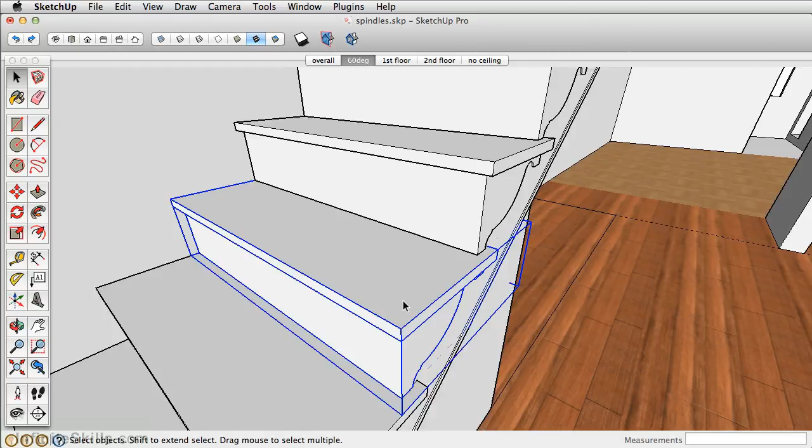In this video, let's add more detail to the staircase by adding the spindles that go up every third step. We'll start with this one here. We're going to zoom in. We're going to take the tape measure tool and draw a line or guide 2 inches and 2 inches off this corner here to get that point.

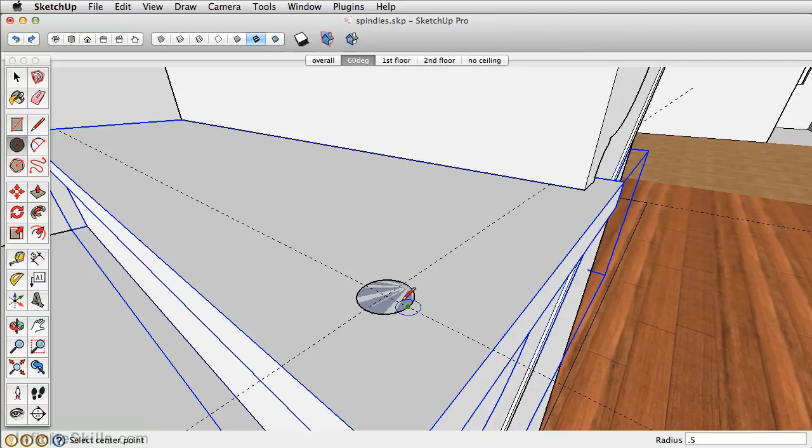Next, take the circle tool, draw a circle that's a 1/2 inch in radius, 0.5, then hit enter. Now, like previous components, I like to make these a component right away. So double click to select the geometry, right click, make this a component, and go ahead and just name it. Make sure replace selection with component is checked, and click create. Go ahead, double click, enter that component.

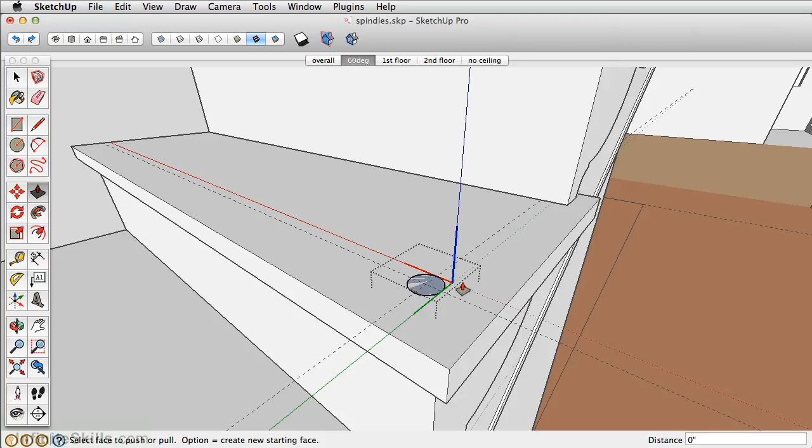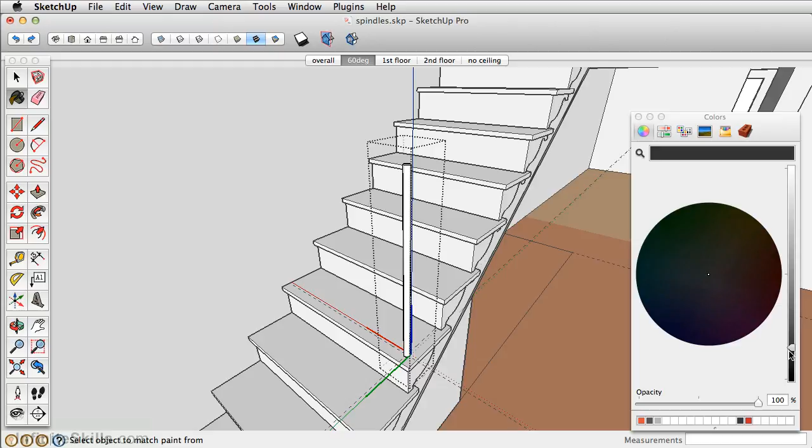Take the push-pull tool and push this up 32.5 inches. That's the height below the top railing. While we're in the model here, let's click on the paint bucket and just give this a dark black texture. I usually don't like going completely dark black. I'll bring it up a little bit just so it's maybe 80-90% gray. The reason why is you can actually see the line sometimes and it just gives it a little extra detail.

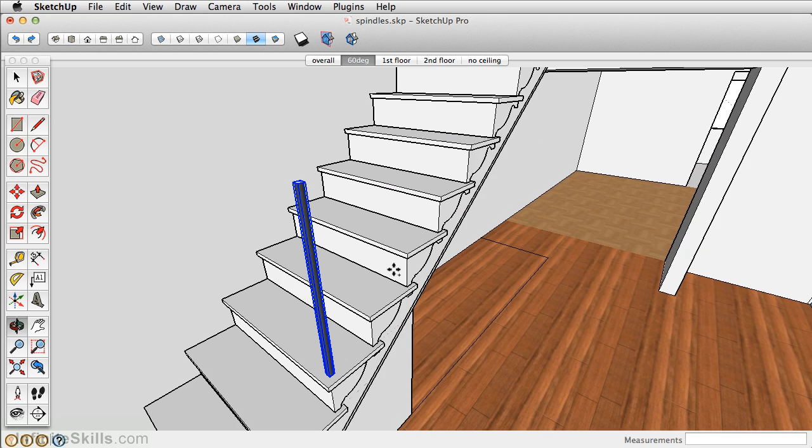We can delete our guides, go into Edit, Delete Guides. And now we can pre-select the component, click on the Move tool, make sure the little plus sign is on using Control or Option on a Mac, and copy this from this point here. So click once, and it's every third step. So we're going to click here. Next, I can type in 4x and press Enter to duplicate our spindles.

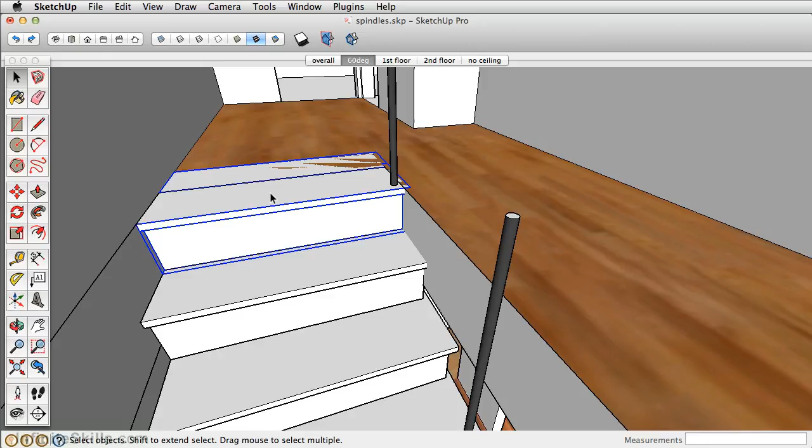Now I noticed up here we have a little bit of an error with our last step. So let's go ahead and make this unique and clean it up a little bit. So let's right click on the component and make it unique. Double click to enter the component. We're going to unhide the rest of the model so that we can see everything. And you may have to go back and forth just to get your bearings correct.

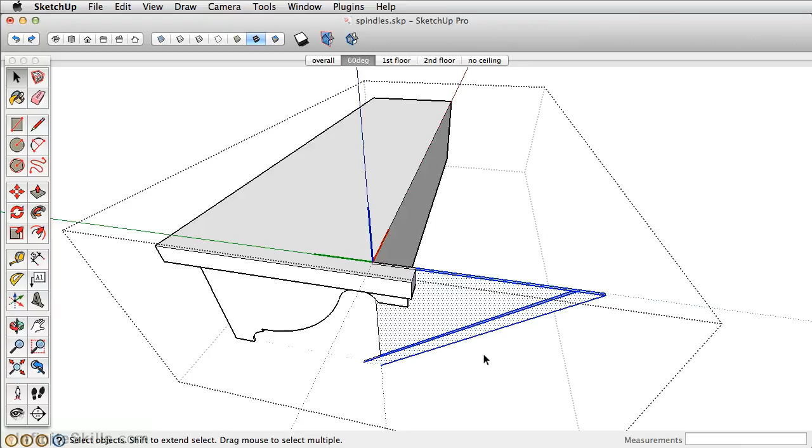So we want this, draw like that. And then we can push pull this whole piece through because we don't need that. Select from right to left and press delete just to delete that extra geometry. And if I hide and unhide, let's take the push pull, push this in flat with that surface. Let's push this flat and erase this extra geometry we don't need.

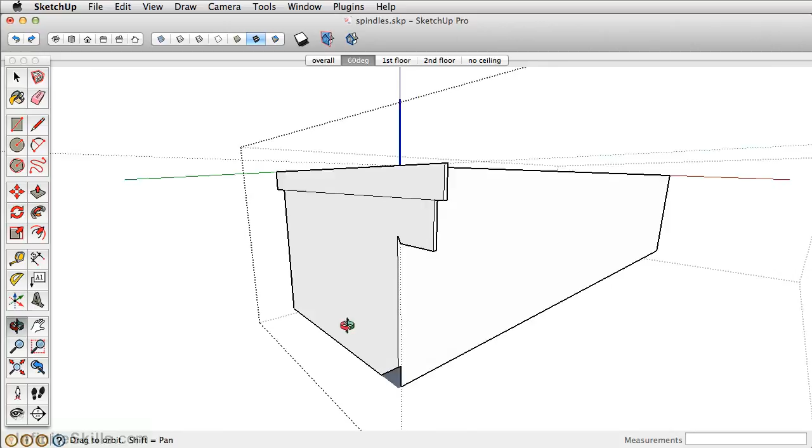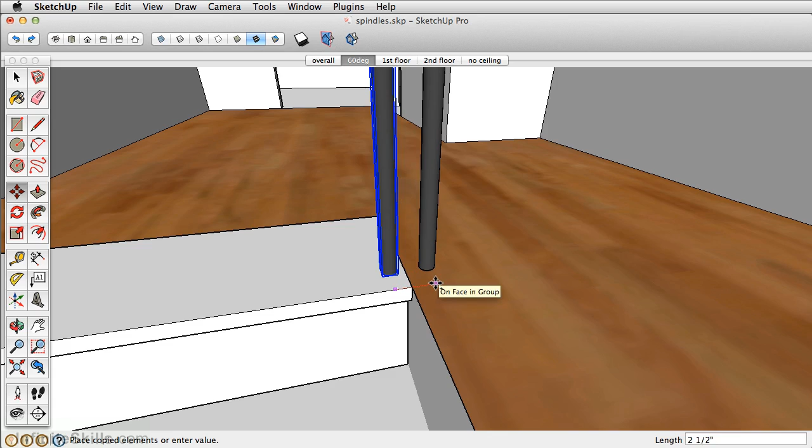This is okay. It's not really ideal to have this stray geometry, but it's an element that we're not going to see. So let's push this back, push this back. Now we're flush to that edge. To finish off the spindles here, let's take the Move tool with Control or Option on a Mac and copy this 2 1/2 inches over, orbit, and there's one spindle here. And then there's one at the end.

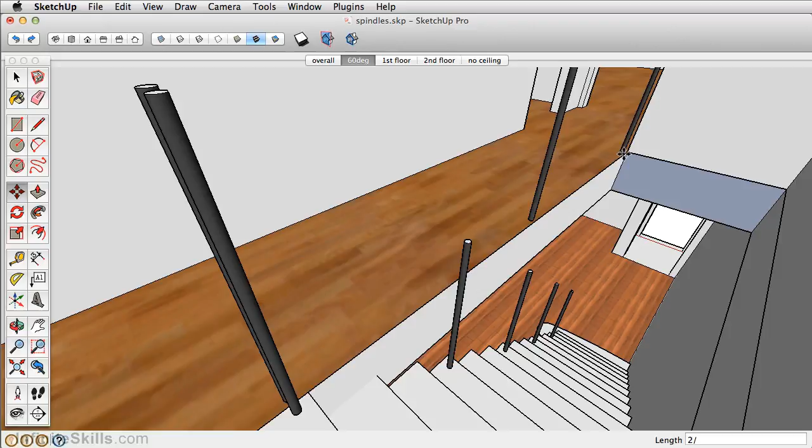Let's copy this all the way down till we reach the end. And then instead of 2x, we can do 2 divide and press enter. And that will divide our copy with a multiple between it. You could type in 4 divide, 6 divide, and so on. In this case, we only need 2. And it's a weird math. The copy is considered 1, and then the copy between is considered 2. So when you're dividing that, always include the additional copy.

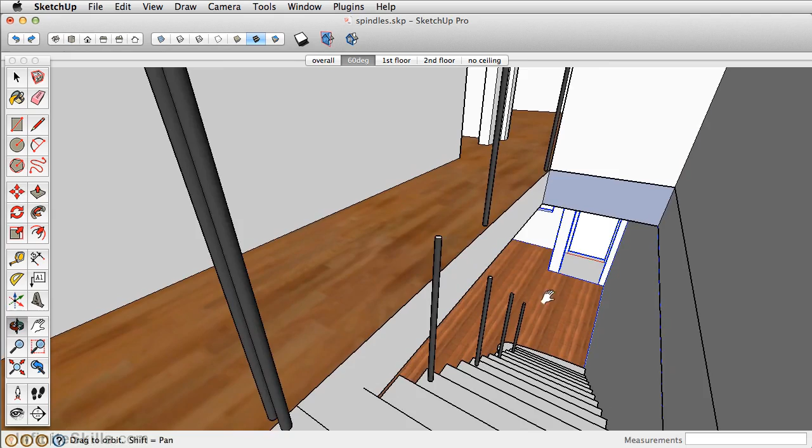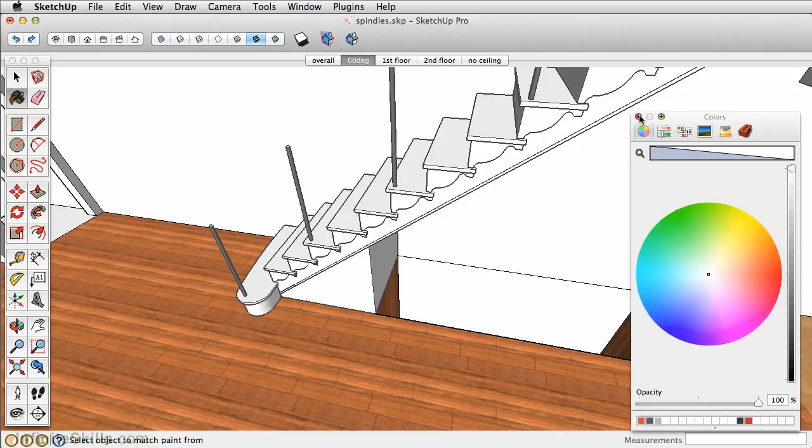We have the spindles. Now we need the bottom spindle. We can take this one and move copy it down to the bottom edge. We can also quickly create our cutout. Just going to move this rectangle down 8 feet. Sample with the paint bucket tool just to make that a white surface. We're not going to create any of the stairs going down. You certainly can, but it'll just give us a visual of what that's starting to look like there.

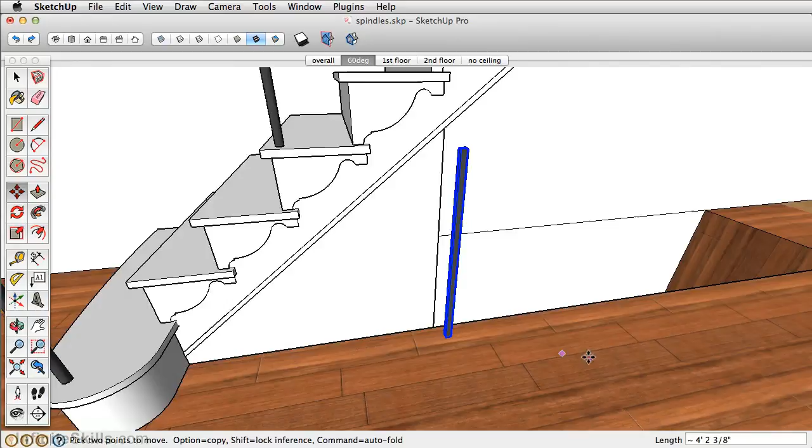We can, however, close out of this group. So you may have to orbit out. Double click so that we're outside of it. And let's take this and move copy right here. Move copy all the way to the edge. And then 2 divide. We'll finish off the staircase in the next video by adding the railings using the Follow Me tool.